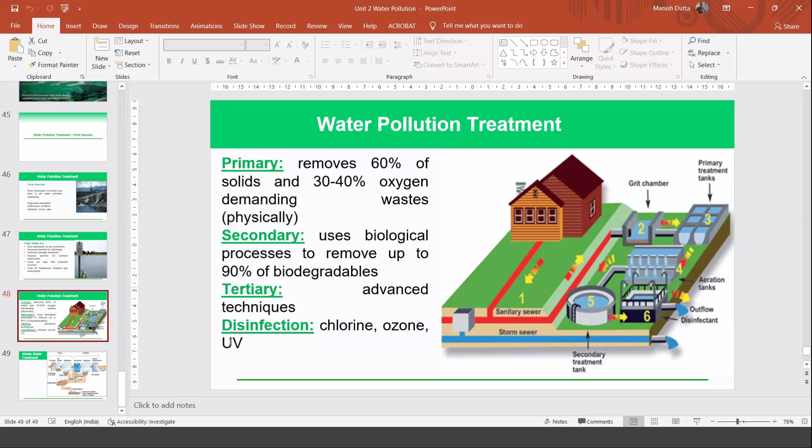So today I will start with the last part of your syllabus, that is social issues and the environment. This is unit 3. There is one small part of unit 2 which is yet to be discussed, which is noise pollution. That I will discuss in your tutorial class, because you have a tutorial on noise pollution tomorrow. So tomorrow you will get to know about noise pollution.

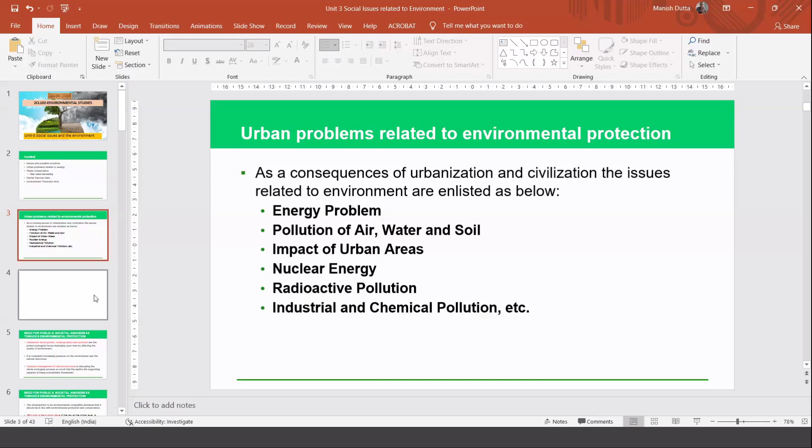So there is a need for public and societal awareness towards environmental protection. You'll get to know a bit about that from the film.

These kinds of cases should be a public interest litigation, or PIL. It's a case where the public files a case against the government, or maybe an industry or a company. It affects everyone. It's not a fight against an individual, or an individual against a company. It's the fight of the whole city, maybe the whole township.

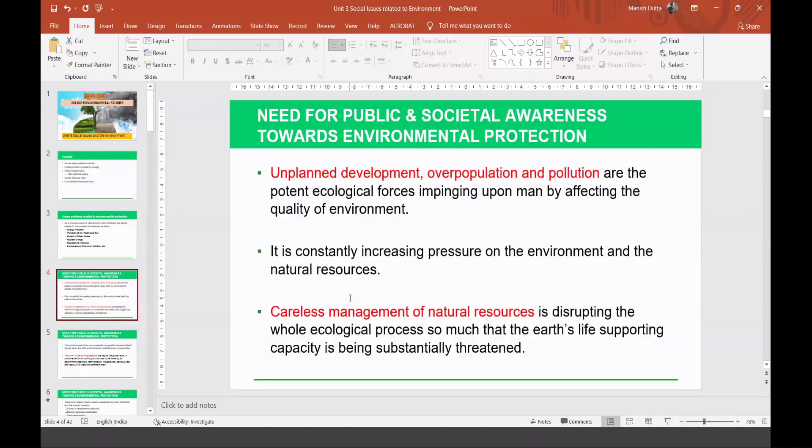Unplanned development, overpopulation, and pollution are the potent ecological forces impinging upon man by affecting the quality of environment.

This is one thing: constantly increasing pressure on the environment and natural resources. Careless management of natural resources is disrupting the whole ecological process so much that Earth's life-supporting capacity is being substantially threatened. These are the points people should understand—that is why social awareness is important. Unplanned development, overpopulation and pollution, and how these really affect the environment, is something people should know about. They should understand how it increases the pressure on environment and natural resources.

Changes do not come in a day or two. It should get ingrained in your day-to-day life. For example, when we realized that wearing a face mask is mandatory to save ourselves and our family from infection, I won't say 100% of citizens of India started following it, but many people did. When you realize how dangerous it is if you do not change your lifestyle, you will change yourself.

So making people realize is important. A lot of effort has been given to make people understand that if you wish to survive this pandemic, you have to change your lifestyle. Similarly, climate change is also like a pandemic. It's affecting us slowly, so we are not able to realize its effect. If we can make people understand the gravity of the situation, a major chunk of people will try to change themselves. That's what is being focused on here.

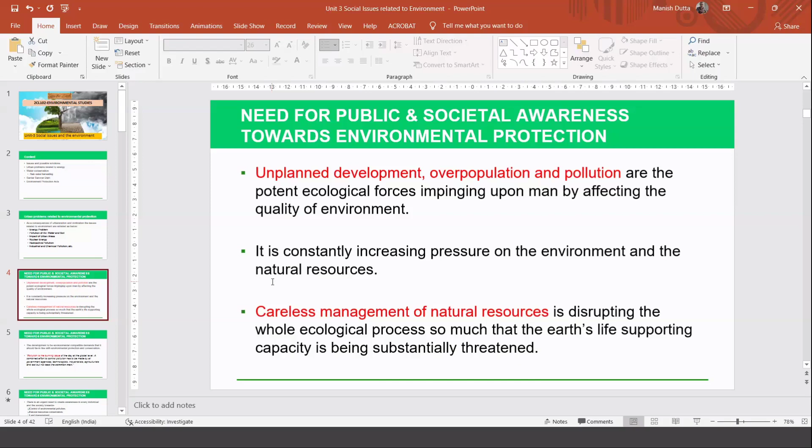Development needs to be environmentally compatible—it should be in line with environmental protection and conservation. Any kind of development should take that into consideration. Pollution is a burning issue at the global level, and the combined effort to control pollution has to be made by all government agencies, technologists, industrialists, agriculturists, and last but not least, the common man. Every person has a duty towards making our environment pollution free.

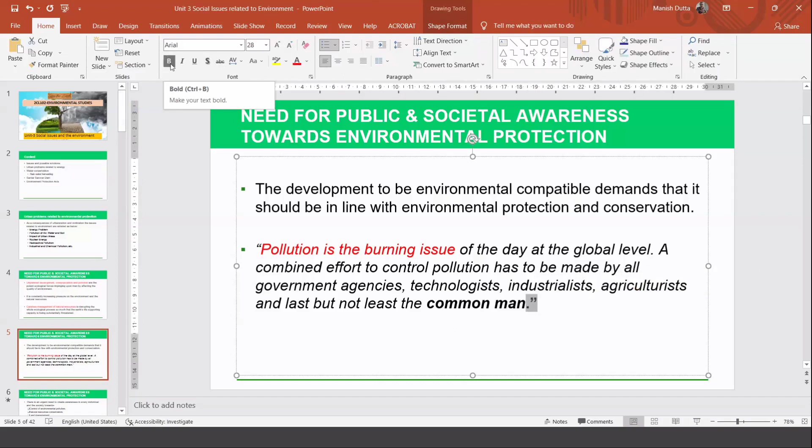These are the areas where urgent awareness needs to be created: control of environmental pollution, natural resource conservation, land management, development of non-polluting sources of energy like solar energy, environmental education, and environmental laws. These are the things we should focus on.

Let's talk about rainwater harvesting. Water is one of the basic human requirements. Even if you live near a seashore, without a constant supply of fresh water it will be difficult—I should say impossible—to survive, because you cannot drink or use saline sea water; you require fresh water. Civilizations have concentrated their livelihood in areas where water availability is easy. It's a very big factor in the distribution of population of an area.

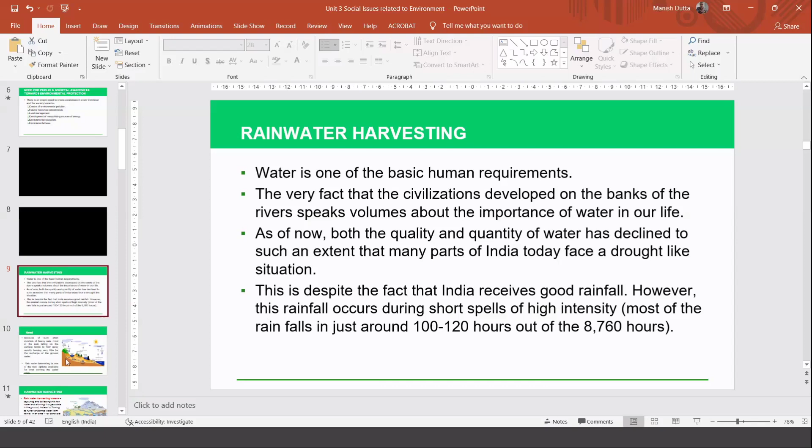What is the need, given such short duration of heavy rain? Why is water conservation and rainwater harvesting so important? Because of the short duration of heavy rain, most of the rain falling on the surface tends to flow away. You cannot store it if you do not plan on storing it—it will simply flow away, to the ocean, river, etc. So finally, it's of no use to you.

What you can do instead is create some lakes or wells. This is where the rainwater gets stored. If you do not have this lake, the water will flow down to the river or ocean. But if you have a lake, the water will get stored there instead of percolating down and reaching the ocean. So this is how you can store water.

Even if the bed of the lake is soil and pervious, you will still have water. But if you do not have such lakes dug, it will simply flow down into low-lying areas from where you cannot access water. You stay here, it's not possible for you to go there and collect water - this could be kilometers and kilometers away. So build lakes if you do not have natural ones.

You will see many reports in India where people have collectively given their effort and converted old and dying rivers and lakes into a freshwater source through collective effort. This is something people can do.

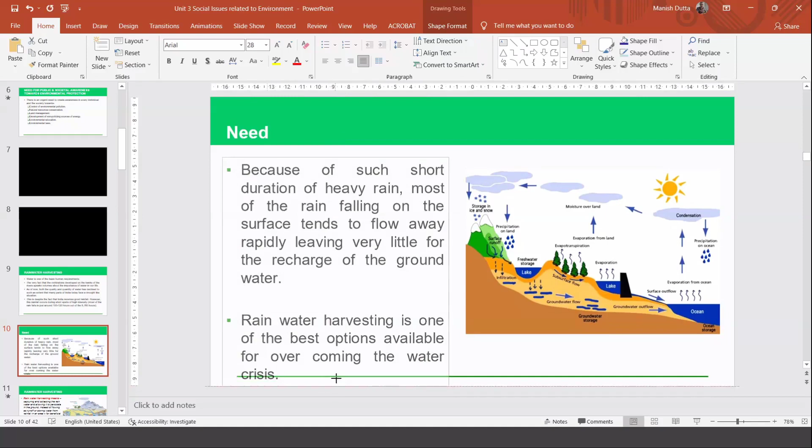Rainwater harvesting means capturing and collecting the rainwater and allowing it to percolate into the ground instead of flowing as runoff, or storing water from rainfall in an area for beneficial use. So you have to capture and collect the rainwater. That is the purpose - instead of letting it run off into the ground or into nearby rivers, you should not let it go away from you. That's the main purpose.

So how can you store it? One option is tank. Reservoirs are structures which store water in the river - see, this is a river. Tanks could be small man-made ponds, you can call it a tank also.

Underground storage could be a recharge basin. You can store water underground and use wells to collect the water later on.

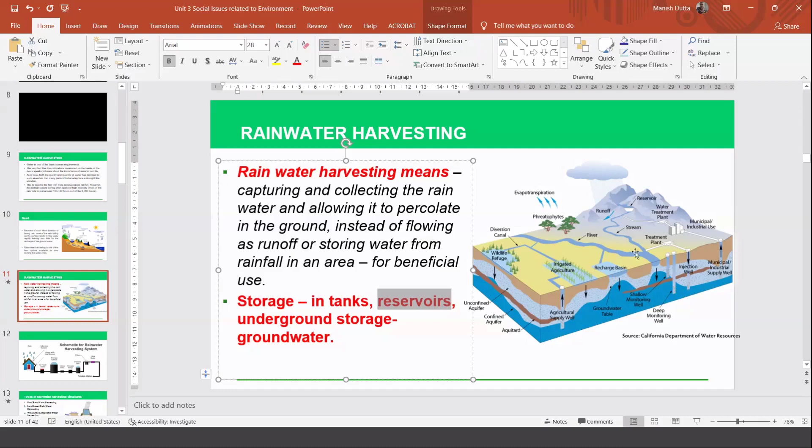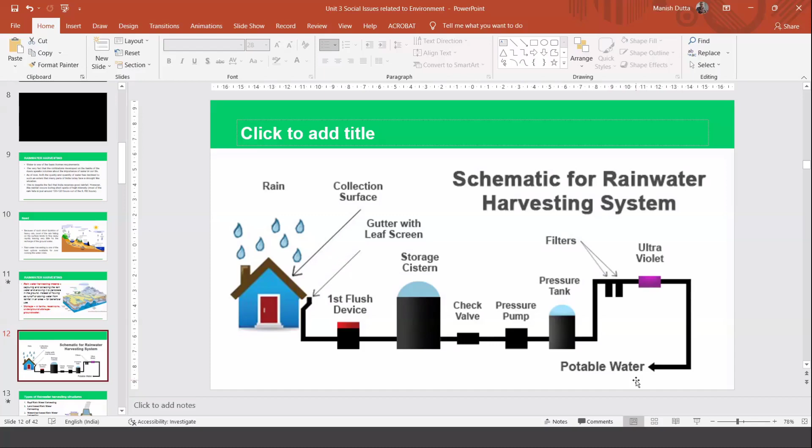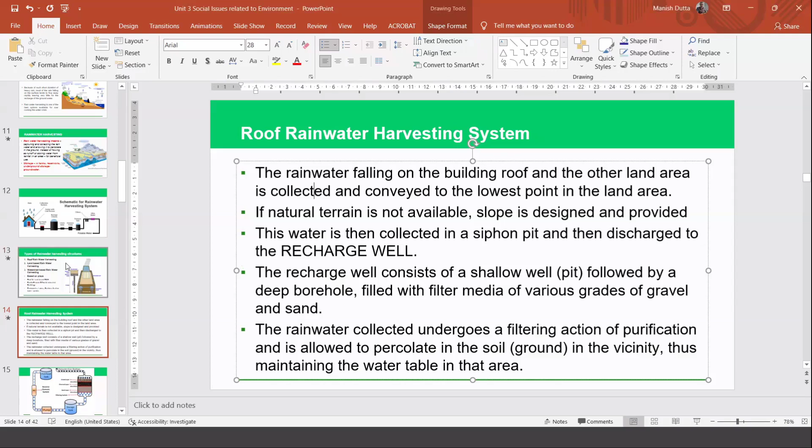This water is collected in a siphon pit and then discharged into the recharge well. So all the rainwater is collected and finally placed in a siphon pit or percolation pit where groundwater will get recharged. So you can store it here - you cannot build a tank large enough in your urban area to collect the water.

What you can do is drop it in a pit underground where water will get soaked inside. Later on, when you require it, you can collect this water. That's the main principle here.

It's called a recharge well. You keep recharging. The recharge well consists of a shallow well followed by a deep borehole. So it is a shallow well, and below it you have a borehole filled with filter media of various grades of gravel and sand.

This is not soil actually. It contains various kinds of gravels for filtration purpose. The rainwater collected undergoes the filtering action of purification and is allowed to percolate in the soil in the vicinity, thus maintaining water table in that area.

If a person individually does that, it won't work. The whole locality should be doing it. So during winter, you will be able to collect water easily because your groundwater is recharged, since the whole area has been working on recharging the groundwater.

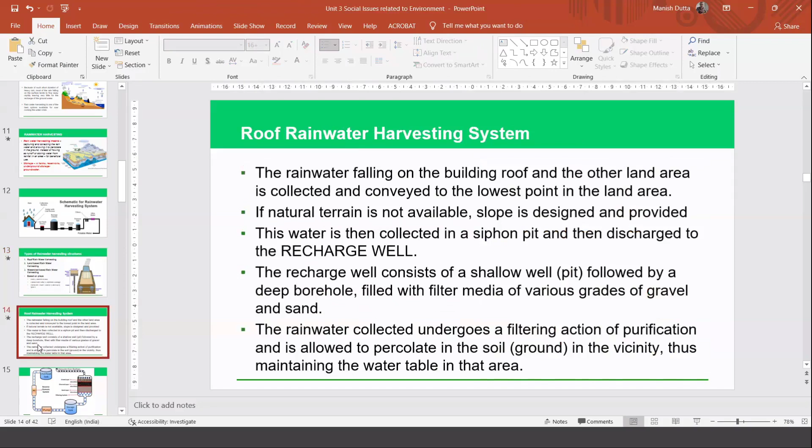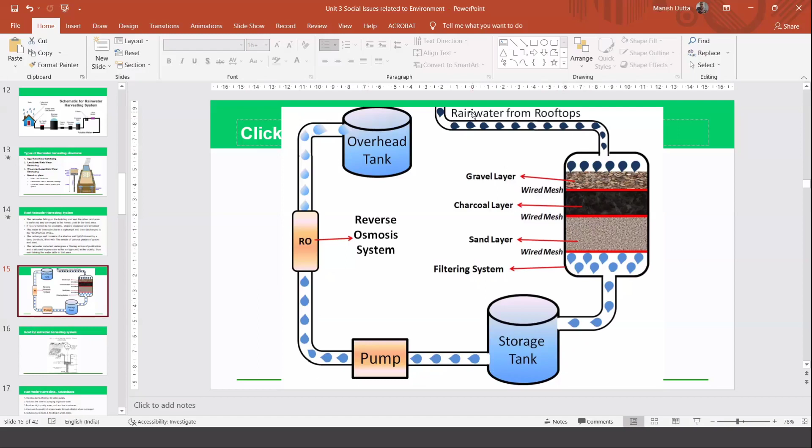Here, groundwater recharge is not present. This diagram has got nothing to do with groundwater recharge. But here you can see that water is not stored in such kind of storage tanks; it is stored inside, under the ground.

So when everybody does that, water can be easy to take out during winter.

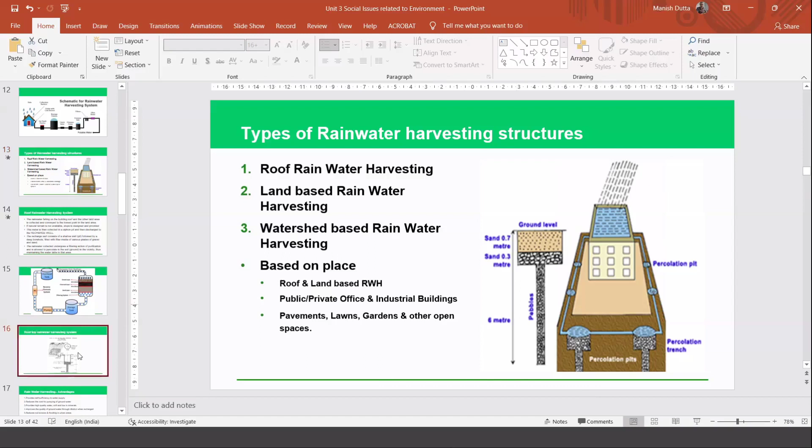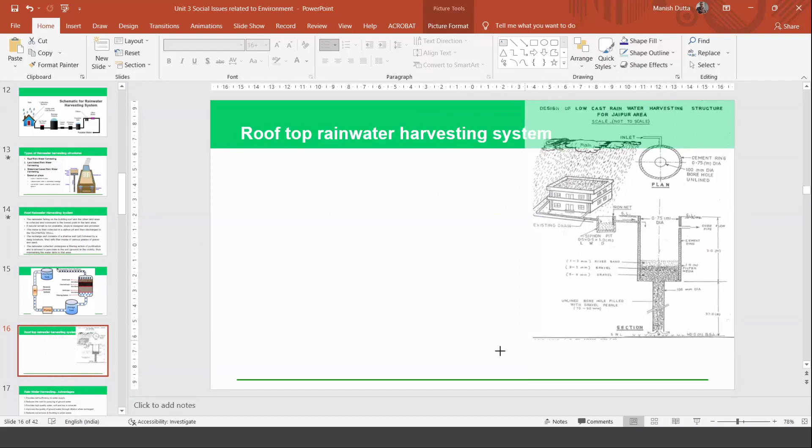Let me know if you have any issue. It's a diagram that I've been explaining to you now from the text that is only drawn here. So let me know if you have understood it.

So this is the roof. Water is being collected and gets transferred into the siphon pit. From here, this water gets transferred into this percolation pit, from where water will slowly get recharged into the ground. In other words, you can call it a recharge well.

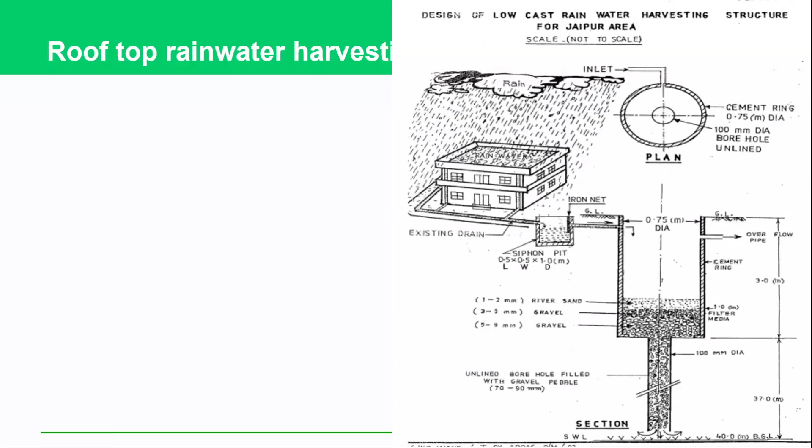Rainwater harvesting advantages: it provides self-sufficiency to water supply. You don't have to rely on others or any house connection of the municipality; you can have water of your own. It reduces cost of pumping groundwater, because if you keep recharging, the water level will be higher, and so pumping cost will decrease.

Quality of water is also good because it is soft water and low in minerals, since it's rainwater basically. So it won't have too much minerals, it won't be hard, it will be soft water.

It improves the quality of groundwater through dilution when recharged. Groundwater has a lot of minerals, so if you recharge water from the rainwater which is pure, dilution will occur. Those things which are high in concentration won't be so anymore if you keep recharging the groundwater.

It reduces soil erosion because you are not letting water flow - you are recharging the ground. In desert areas, rainwater harvesting is the only relief.

Yeah, I missed this point: it's less expensive and easy to construct. This is also one very important point.

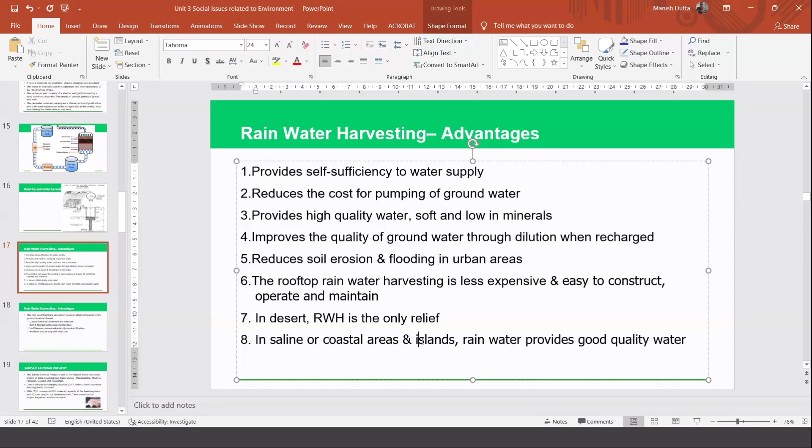In saline or coastal areas and islands also, rainwater provides good quality water because it's a coastal area, and the maximum water that you have in the ocean, you cannot use. So rainwater harvesting is very important.

More advantages: roof catchments are relatively cleaner when compared to ground level catchment. If you are using the roof catchment method, losses are minimum, because the roof is something you are obviously going to build for your home, and that itself serves as a purpose of rainwater harvesting. Built and maintained by local communities, no extra money spent on it.

No chemical contamination because it falls directly on the roof - there's no other way of getting contaminated. Available at doorstep with least cost - you do not have to go outside, your own roof is providing you water. If you can plan it accordingly, it is going to provide you water at minimum cost.

So this completes the rainwater harvesting. We will start with the Sardar Sarovar project on the next day. So any questions from you people?